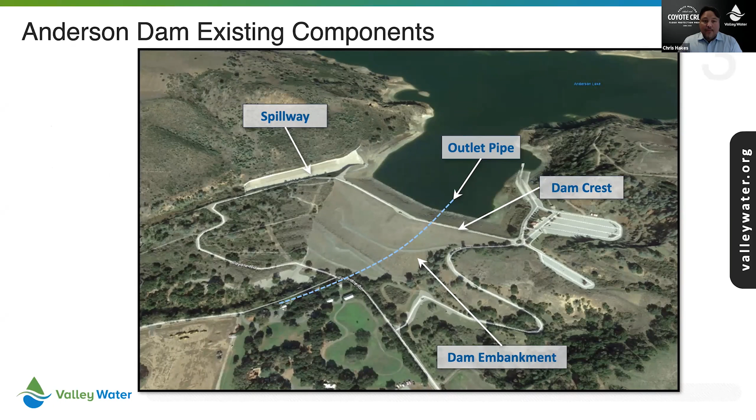That's the existing components. As part of the Anderson Dam Seismic Retrofit Project, we'll be addressing about 5 different areas. First, we'll be taking up all of the material in the embankment except for the core material. When we started the project in 2013, it looked like we just had to add material to the downstream, left side of the dam. Unfortunately, geotechnical explorations in 2016 and 2017 informed us there was a greater potential for the middle of the dam to fall down and depress, or slump, during an earthquake. Since that's the case, we're going to remove all of that unsuitable material and replace it with material that won't slump like that during an earthquake.

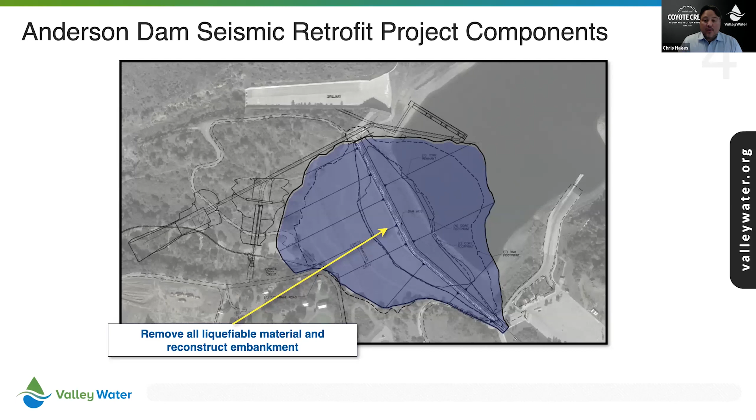We do have a spillway. Originally, we were going to patch it and make minor modifications and repairs. However, after 2017, some of you may remember the torrential rains, and there was the dam up north, Oroville, which had a massive failure of its spillway. As a result, the California Department of Water Resources Division of Safety of Dams, DSOD, mandated that all criteria for spillways be updated, and most spillways across the state need to be fully replaced. So during this project, we'll also be replacing our spillway in its entirety.

We have a new low-level outlet pipe that no longer runs under the center of the dam. This is to accommodate up to 4 feet of movement during a seismic event. We've got a large tunnel with a pipe inside that can move, allowing it to maintain operations during and after an earthquake. And then we have a temporary water diversion system, by which we'll actually drain the reservoir completely empty.

What we'll talk about with the FERC Order Compliance Project is a little bit different—we're draining down to what we call dead pool. The diversion system will actually let us go down to the bottom of the reservoir so we can do the embankment construction. And then we have a high-level outlet pipe.

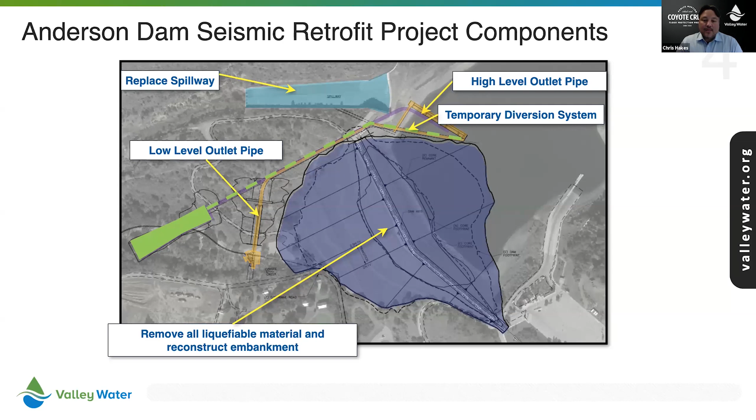This is another mandate from the Division of Safety of Dams, DSOD, that allows us to drain up to 30% of the reservoir capacity within 7 days if directed after a seismic event. So that's a new requirement to meet existing standards as well.

So let's talk about what happened on February 20th. We did receive a letter from the Federal Energy Regulatory Commission that said that the interim risk reduction measures currently in place, our current seismic limit, was insufficient because of the public safety aspects and the risk to the downstream community that existed.

Even though we had a back and forth about what the appropriate level of the reservoir was to balance water supply, environmental need, and public safety, FERC is pretty conservative, and they've said the best way to make sure you don't have an event of uncontrolled release of water during a seismic event is to make sure the reservoir is as low as possible for as long as possible. So that's basically the crux of the directive.

There were 6 elements identified here. We were to immediately lower the restricted elevation, the operating level of the reservoir, from 592 to 565. We were also to develop a plan to drain the reservoir down to dead pool and maintain that level in the case of rains, through the season. On October 1st is when we're actually supposed to start draining down to dead pool. They have given us some time to put that water to beneficial use, which is what we're doing. And then, of course, develop a plan to maintain dead pool in the event of significant rains.

We have to expedite the tunnel construction. So I mentioned the new outlet tunnel that's going through our right abutment. As a way to better control the water surface level in the reservoir, we will be constructing this new tunnel, which varies in diameter depending on where you are, between 19 feet, 23 and a half feet, and 8 feet in diameter. We'll be constructing this tunnel to give us the ability to discharge more water out of Anderson and better control the reservoir level, about up to 5 times what we have now when factored in with the existing outlet.

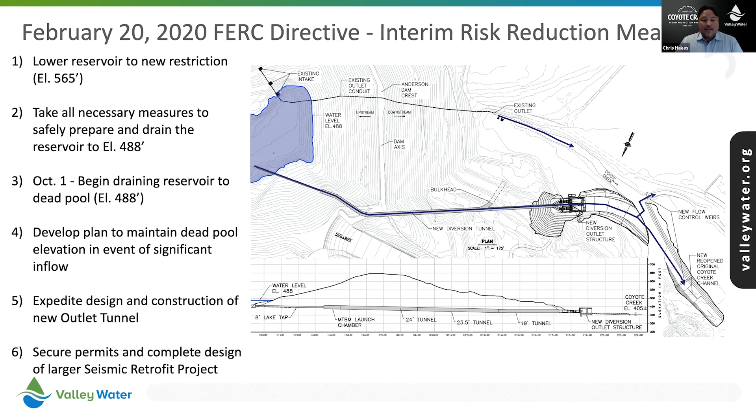So our response, when we received that letter on February 20th: we were in immediate compliance with the new restricted level of 565. We were actually at about 552. That's because we were in our winter operations mode and had already been setting the level of the reservoir so as not to exceed the restriction.

We immediately started planning the Anderson Dam Tunnel project to expedite design and construction of the outlet. So basically we spun off a portion of what used to be the Anderson Dam project. We took that tunnel outlet, modified it a bit, and incorporated it into the FOCP through the Anderson Dam Tunnel Project, or ADTP. I'm sorry for all the acronyms. We also created the Federal Energy Regulatory Commission Order Compliance Project, or the FOCP. That contains not just the tunnel construction, but all of the different measures we're going to use to address the order given to us by FERC.

It basically has 11 unique elements across 4 different areas. For this meeting, I think the key area to talk about is the draining of the reservoir, the construction of the tunnel, and the flood protection mitigation elements that have been identified. Those are the Coyote Creek elements you'll be hearing about later. On May 26th, our board of directors did approve the preliminary project description, which is basically a listing of all the different elements contained in the FOCP.

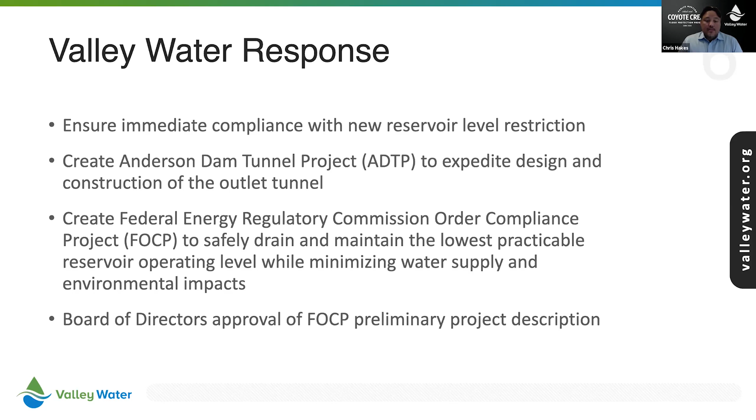So what happens during the FOCP? Of course, we're already in compliance with the elevation 565. October 1st, we'll begin to drain the reservoir down to dead pool, or 488. Dead pool is not completely empty. It's the lowest level that we can drain the reservoir to using our existing inlet-outlet system. So there will be water in the reservoir.

Unfortunately, it's not usable from a recharge, drinking water, or environmental release perspective because we can't get it out of there. And dead pool water does tend to be a little bit stagnant. It will be shallow compared to the overall depth of the dam, which creates a hotter condition where the dissolved oxygen in the water will probably drop, leading to an inhospitable environment for any fish that may be caught there. That is part of the reason why it's called dead pool. So on October 1st, we will begin draining.

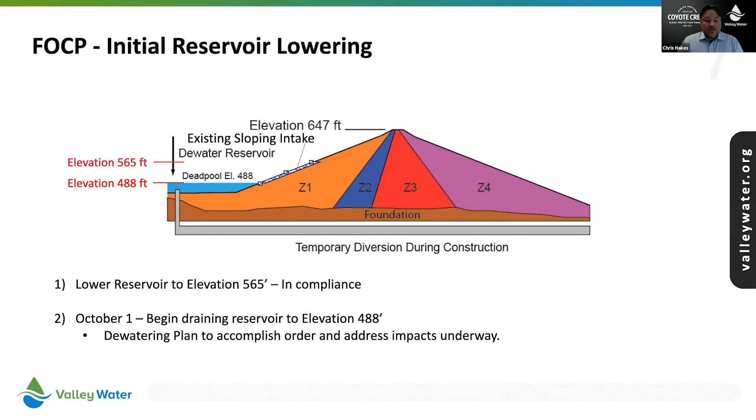We have submitted a plan, not plans and specifications, but a plan to FERC on March 20th in order to get this done for the outlet tunnel construction. We'll begin construction in early 2021. We expect the tunnel construction itself will take between 18 and 24 months, and then we'll have the tie-in to the reservoir, and we expect the project to be complete by the end of 2023 and go into operation.

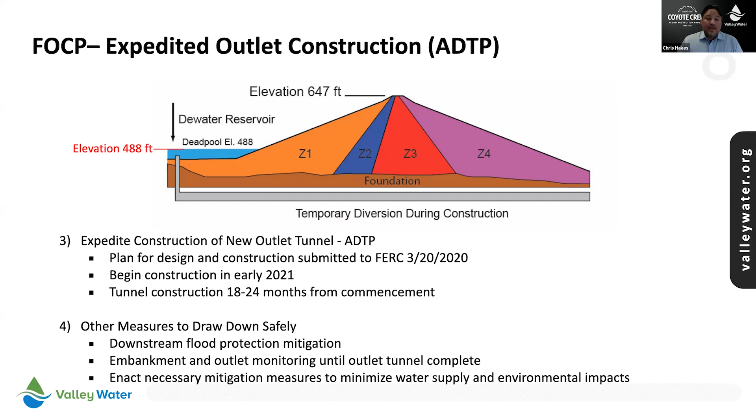Other measures we've identified include downstream flood protection mitigation - those are the Coyote Creek elements. We'll be monitoring the outlet and the rim around the reservoir as we draw down at a very slow, cautious rate to make sure there's no landslides that would affect our ability to use that outlet system. We're also identifying other mitigation measures as necessary to minimize impacts to both the environment and water supply.

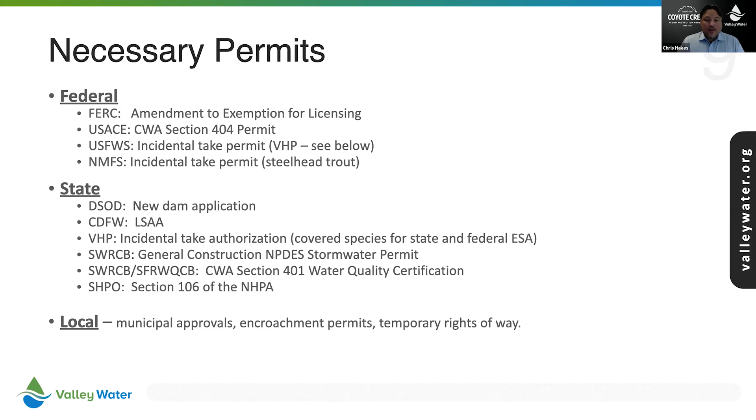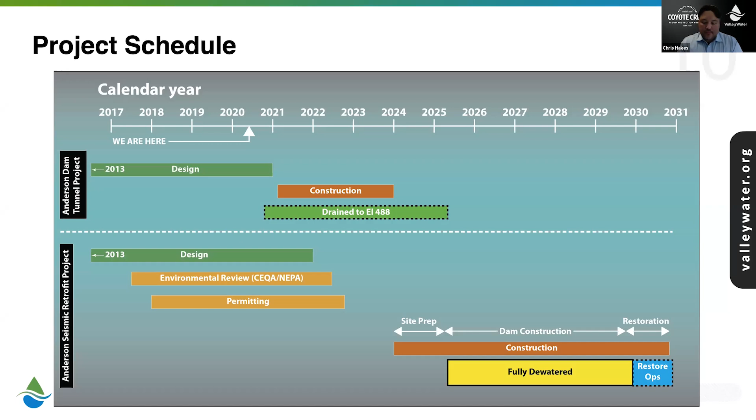And that's the end of my presentation, so I'll turn it back over to Christine.

Tonight, I'm going to talk about the preferred project alternative. Before I delve into the details of the project, let me close this so you can see the entire presentation. I wanted us to get our bearings into where we are in the Coyote Creek Flood Protection Project. This first column shows the major phases of the project. Let me get my pointer. So these are the major phases: planning, design and permitting, and construction. The next column shows the major components of each of the phases.

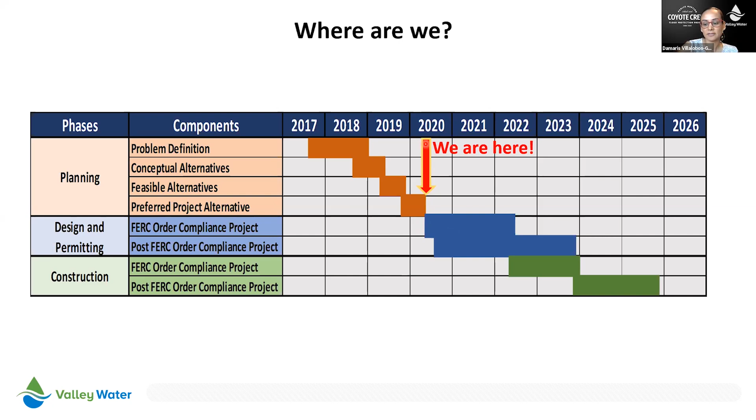If you were able to join past meetings in spring and fall of 2019, you probably heard me talk about problem definition, conceptual alternatives, feasible alternatives, and now we are in the preferred project alternative component. Basically, we are at the end of the planning phase, moving into design and permitting within the summer of this year. Alec is going to talk a little more about this near the end of this presentation, but this is where we are right now, at the end of the planning phase of the project.

Now, what am I going to talk about today? I'm going to give a very brief overview of what we've accomplished together in past meetings. I'll talk about the feasible alternatives we've considered and formed together, and how we move from feasible alternatives into the preferred project alternative via the natural flood protection process. Then I'll talk about the phasing of the project elements, which relates to what Chris Hakes mentioned in his presentation, and go over the project timeline again. I'll introduce the design team, who will talk about next steps—what you can expect to see in the next couple of weeks, months, and years.

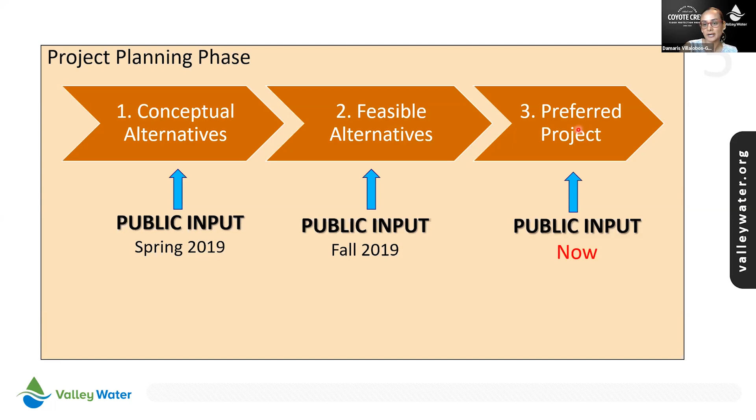Now, what have we accomplished in the past? For those who joined our last meetings, or couldn't, those meetings have been recorded and posted on our website in case you want to review them or watch for the first time. Back in spring of 2019, I presented the conceptual alternatives of the project. We obtained public input and used it to create the feasible alternatives. In fall of 2019, I presented the feasible alternatives and the criteria for them, obtained public input, and now we're moving into the preferred project. At some point we need to have the preferred project to move into design and construction—that's where we are now, and we're getting comments right now.

Before I delve into the details of the preferred project alternative, I wanted to remind everyone that the project scope is very long—9 miles, from Montague Expressway all the way to Tully Road. There are several major parks, roads, and critical facilities within the scope, like Watson Park, William Street Park, Selma Olinder, and Kelley Park, just to name a few. We also have major highways like Highway 880, Highway 101, Highway 280, and other major streets like Oakland Road, Berryessa Road, Santa Clara Street, William Street, and Tully Road, plus several residential, industrial, and commercial areas within the project scope.

Because the project scope is so long, we've divided it into sections or areas we call reaches. So whenever you hear me say reach 4, reach 5, I'm talking about a specific area. Reach 4 goes from Montague Expressway to Old Oakland Road. Reach 5 goes from Old Oakland Road to Mabury Road. Reach 6 goes from Mabury Road to Santa Clara Street. Reach 7 goes from Santa Clara Street to Highway 280. And Reach 8 goes from Highway 280 to Tully Road.

Now, why am I mentioning this? Because as I go over the list of feasible alternatives, I'm talking about alternatives for the entire project scope—we're looking for the preferred project that meets requirements for the entire scope, not just a specific section. For this meeting, I'm focusing on project elements within Reach 6 and Reach 7, basically from Mabury Road to Highway 280. On June 10th, last week, I focused on Reaches 4 and 5, and on June 11th, I focused on Reach 8. You're welcome to go to our website and review those recordings.

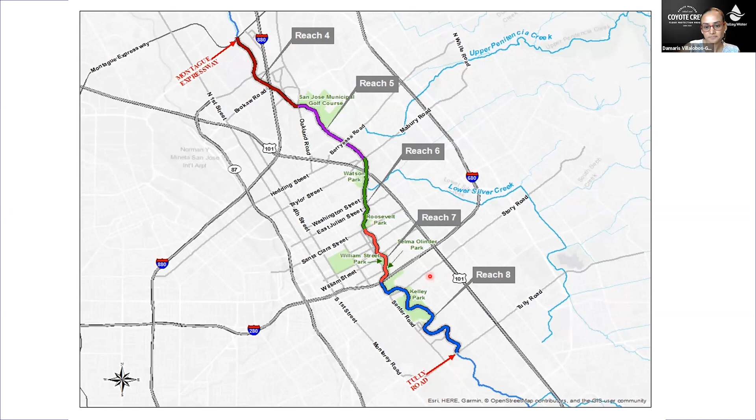Now, how do we develop a project alternative? In the past, as we had meetings in spring and fall of last year, what we did is we developed together what I like to call flood risk reduction options for each of the reaches or areas. For example, for Reach 4, we developed 2 options. For Reach 5, we developed 1. For Reach 6, we developed 1. For Reach 7, we developed 5 flood risk reduction options. And for Reach 8, we developed 1.

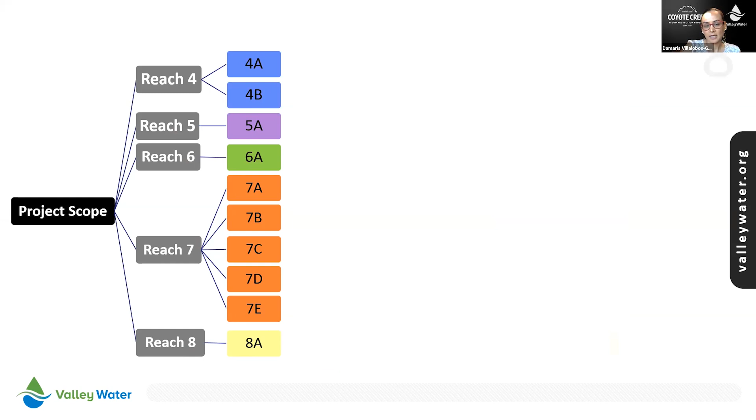So what does it mean to have a project alternative? A project alternative is basically a combination of these various options. Alternative 1, for example, we have 4A, 5A, 6A, 7A, and 8A. Alternative 2, we have a different combination, now selecting 7B. Project alternative 3, now we're selecting 7C, 7D, 7E. And then you notice we haven't used 4B, so now we have to select 4B and make different combinations with the different flood risk reduction options for each reach.

Now we have a total for this specific project, for the Coyote Creek Flood Protection Project, a total of 10 project alternatives, and I'll go over what those are specifically for reaches 6 and 7. We always add the no project alternative to all of our projects, because sometimes having a no project, doing nothing, is better than actually adding some structural elements to the various areas. So how does 6A look like? How does 7A, 7B, C, D, E look like for this community?

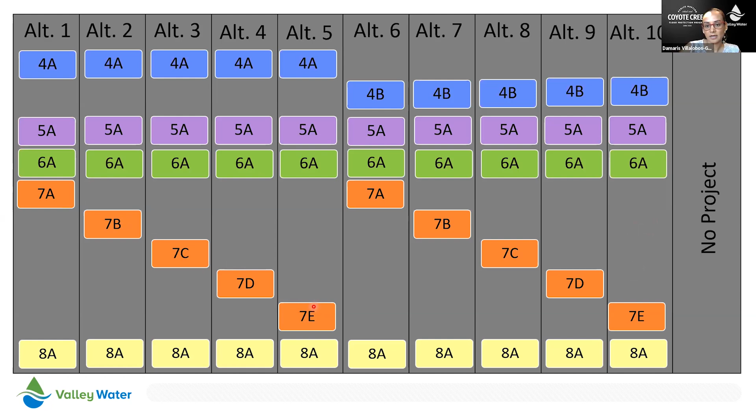Okay, so now going into 6A, before I go into the details, I want to go over the legend. Pink means a berm, and I'll show you pictures of what this is. Yellow is a passive barrier, and orange is a flood wall.

For Reach 6, and we only have one option, 6A, what we're proposing is to have flood walls from Mabury Road all the way to Highway 101, reducing the risk of flooding to this critical facility, the City of San Jose Mabury Yard, as well as the industrial/commercial area on the west side of the creek. We're also proposing a flood wall that's gonna reduce the risk of flooding to Highway 101.

Now moving on to Watson Park. You might remember this from past meetings, but what we're proposing is an approximately 1,200 feet long, 6 feet tall flood wall that is gonna replace the existing retaining wall that is in that location. And that's gonna continue and become a passive barrier and then a berm.

So these 3 elements work in conjunction to basically contain any flood waters within the park, so that they don't get out of the park, go into Jackson Street and flood areas of Monferrino Drive like they did in 2017. So all of these project elements work in conjunction.

Now, we're also proposing flood walls to reduce the risk of flooding at the Empire Gardens Elementary School. Moving to the east, we're proposing a short flood wall to protect Kellogg Company. And we're also proposing a flood wall approximately 5.5 feet tall to reduce the risk of flooding to the Parkside Terrace apartments.

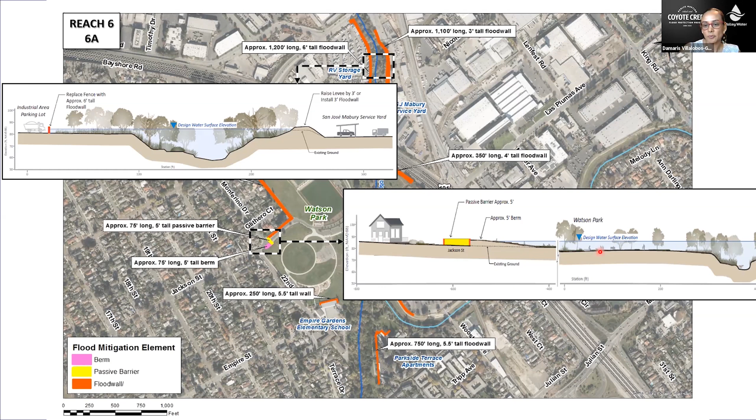As you might remember, Watson Park got flooded during 2017. Watson Park is part of the historical floodplain of Coyote Creek. So what we're doing is allowing the creek to do what it wants to do in this area without flooding the residential areas. And here's another picture of how this area might look like, with the Parkside Terrace apartment buildings and an approximately 5.5 foot flood wall.

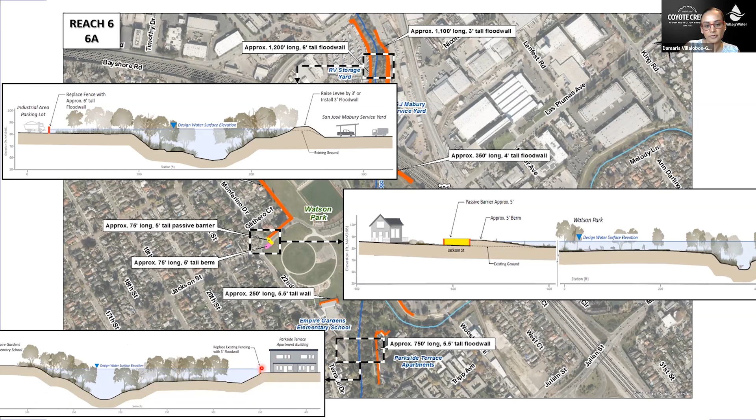Now, how would a flood wall look like? We don't know yet. That's gonna be determined during the design phase of the project with your help and the help of stakeholders. So we understand, and the board understands, that it is important for any element we're proposing to reflect the character of the community, and during the design phase, aesthetics is gonna be an important element. We know what we need to have in here, we know the element, a flood wall, but in terms of how it looks, it can look in various ways.

If you ask me, if I have a flood wall in my neighborhood, I would like to have murals and art and things like that, but other neighborhoods might want some other things. So these are just examples of how flood walls might look.

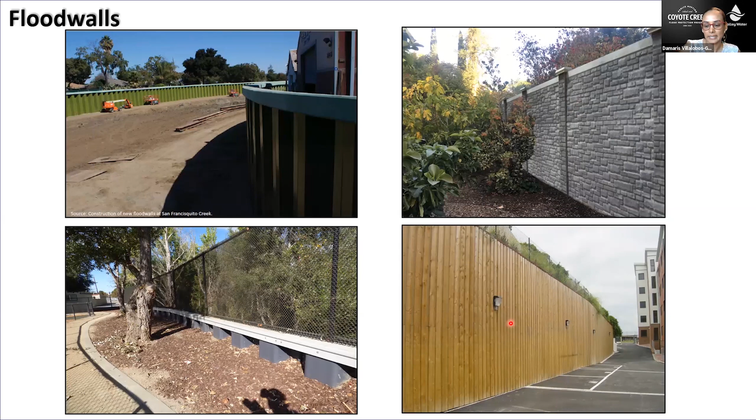Now, how would a berm look? We don't know yet. What we do know is a berm is a kind of raised strip of land that provides a vertical barrier to contain water within a specific area. This first example is an existing berm that was constructed right after the February 2017 event. It's approximately 3.5 feet tall. I included this picture with this person standing at the bottom of the berm, and some people standing at the top of the berm. Again, this is a 3.5 foot berm.

Back in 2017, after the flood event, they also built a road on top of the berm to allow access into the other side. So that's something that is possible to add, a road to access it, inspect it, and do any maintenance needed on the berm.

Now this is another example. When we went to the San Jose Parks advocates to talk about the project, some of them said they'd like to see local pollinator plants that can attract critters, bees, and hummingbirds. So that's another example of how it might look, depending on the neighborhood. There are other different examples of a berm. All we need is a vertical clearance, and of course we need enough room, wide enough to build that berm.

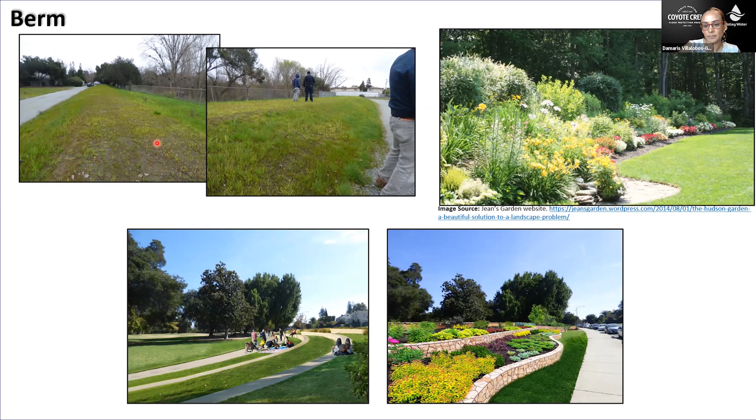Now, I'm not going to go into the details of a passive barrier, but I've included these in the presentation because this presentation is also on our website. You're welcome to look at the videos of how the passive barrier works. I'm not going to spend a lot of time on it today in the interest of time.

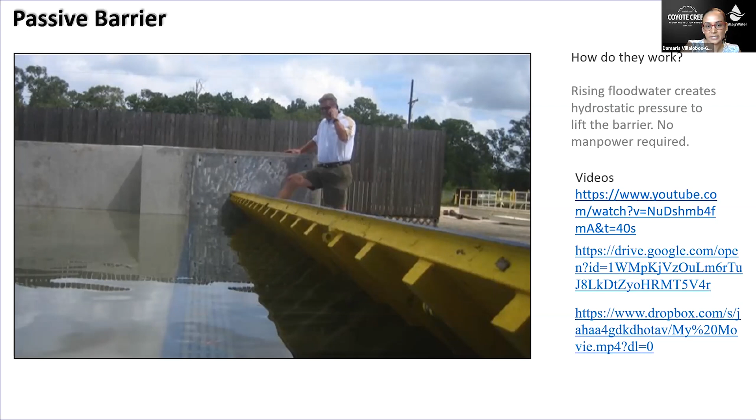All of the elements I mentioned before, flood walls, berms, all of those apply to Reach 7 as well. So I'm not going to present pictures for all of the options for Reach 7, because as you saw, there are 5 flood risk reduction options for Reach 7. I'm going to try to be brief and succinct, but there are a lot of elements and I want everybody to understand how they work together and what elements we're proposing.

So I'm going to start with 7A. Again, we have 7A through 7E. I'll start with the legend: pink means berm, purple means elevate, orange means flood wall, and yellow means passive barrier. To avoid spending too much time on these maps, since I don't want to take all the time away from hearing from you, I changed these callouts. The pink ones are the elements that change from option to option, and the white ones stay the same.

So I'm only going to go over everything for option 7A, and for options 7B through E, I'm only going to go over the pink elements, which are the ones that change.

Now, for the purple areas, we are proposing to elevate those structures. We're proposing to elevate structures located on South 17th Street between Santa Clara Street and San Fernando Street—3 properties. Elevate all 4 properties located east of Arroyo Way, 3 properties located west of Brookwood Avenue, 2 properties at the corner of San Salvador Street and South 17th Street, and 1 property on William Street, right next to the William Street Bridge. Elevate basically means raising the structure above the base flood elevation.

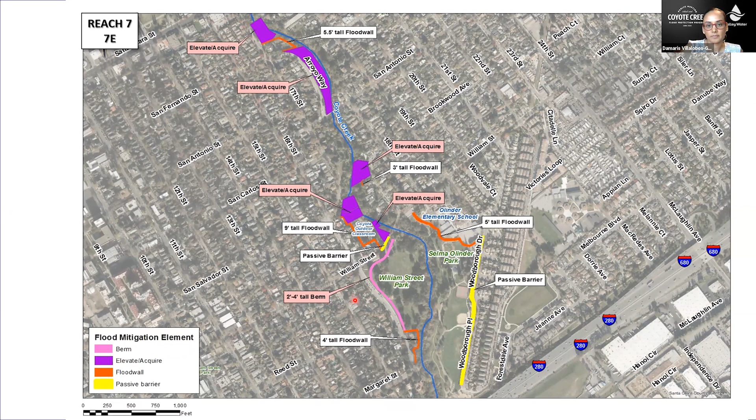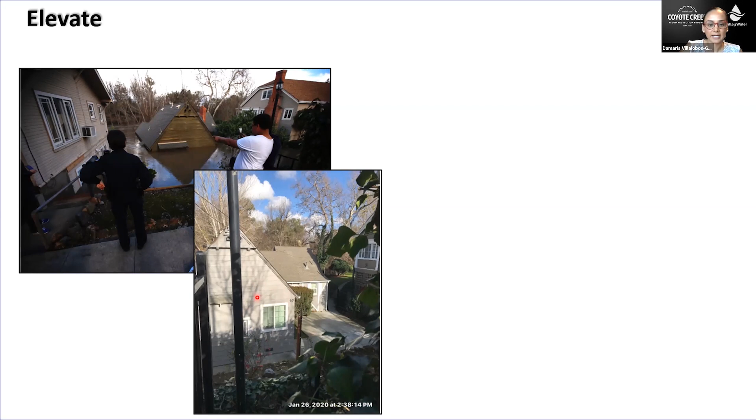This is the home during 2017. This is the date, January 26, 2020. This picture is recent, well, 5 months ago, but it seems like 10 years ago. You can see that the home has been painted and some elements have been beautified, but it's still located within the banks of the creek.

So what does elevate mean? Back in January, we contracted a consultant to do a planning level feasibility assessment to see if we could even bring elevate to the table, because what if the home cannot be elevated? We asked them to see all 10 properties we were proposing to elevate, but we were only able to see 4 properties, unfortunately. The information they gave us was very helpful.

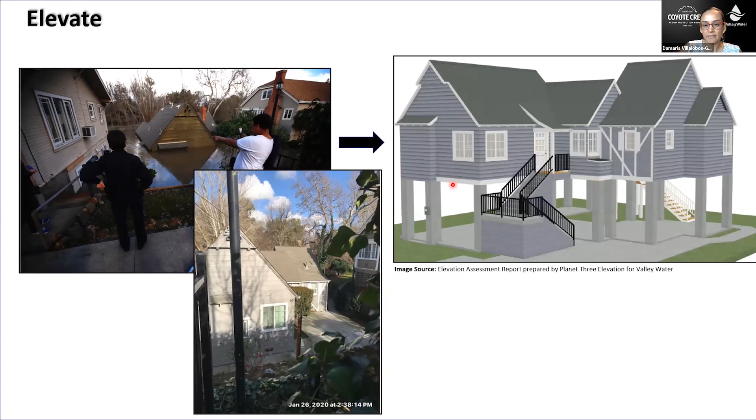So this is a rendering of this same house. This is actually the front of the house, this area here. You can see the window, you can see this area here. This is the front, and basically it is elevated on columns, elevated up to the street level.

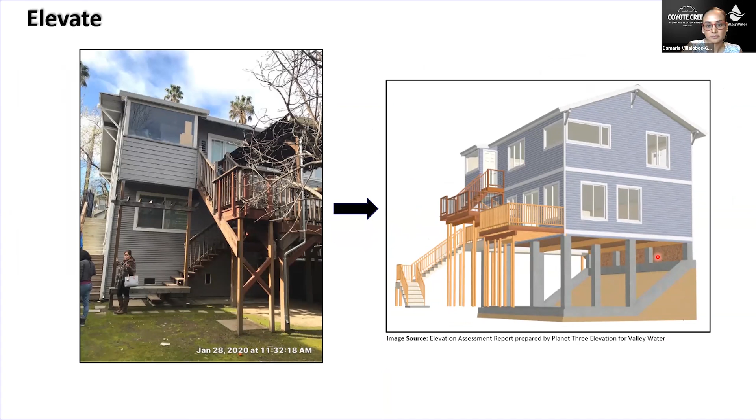Now, how do we go from having all these 10 or 11 feasible alternatives into actually selecting a preferred project? We do this using the Natural Flood Protection Framework. This framework is a Valley Water Board policy that looks to balance environmental quality, community benefit, and protection from flooding in a cost-effective manner, considering the physical, hydrologic, and ecological functions and processes of a stream. So basically, this gives us the least environmentally damaging practicable alternative.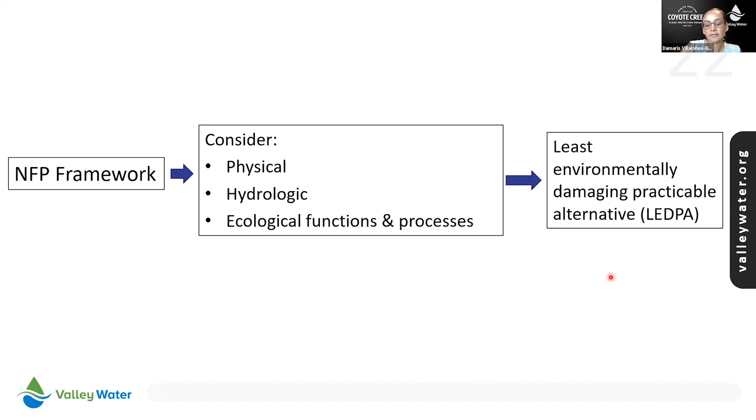This framework was not developed by the project team. It was developed a while back in the early 2000s, a Valley Water Board policy developed by a group of external and internal experts. It grades a project from the point of view of 36 different environmental criteria. What does that mean for us? I've listed all of the project alternatives in this slide, from alternative 1 all the way to 10.

And I also listed the estimated planning level costs. The project cost in the planning level has been approximated between $72 million and $92 million. I also added the expected annual operations and maintenance costs in this last column, between $1.2 and $1.3 million annually. And then for no project, basically you don't have any cost of the project, but you also have an approximated average cost up to now of doing maintenance in the creek.

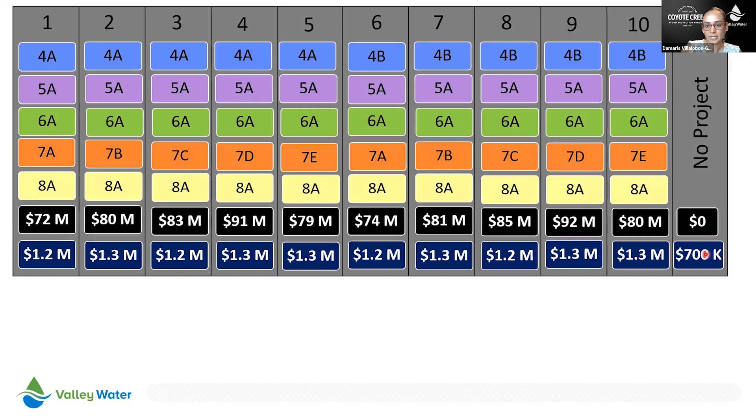You apply the NFP framework to select the preferred project alternative. This NFP, or Natural Flood Protection Framework, is a qualitative method, and it's selected two high rated project alternatives, alternative 7 and alternative 10. I'll show you how they look for the two areas that we're focusing on.

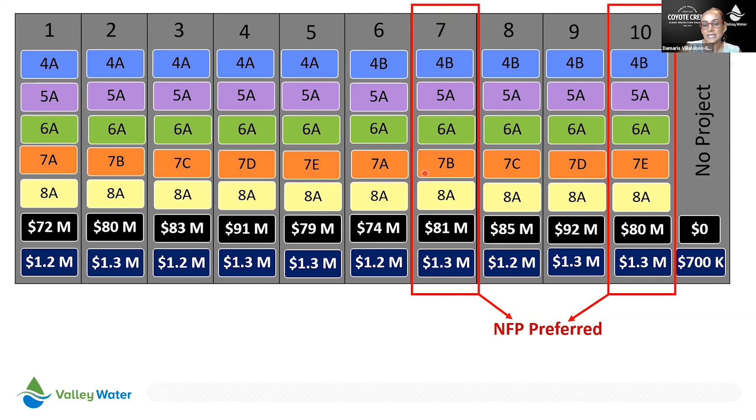6A, of course, doesn't change. For reach 7, we have 7B and 7E. Just showing you a picture of 6A, we only have one option. 7B, the purple areas here, acquire. It's all acquire, and then we have the berm on the western edge of William Street Park. 7E is the hybrid option, elevate or acquire in the purple areas. We've also had the NFP process select the 2 to 4 feet tall berm. So those are the preferred options.

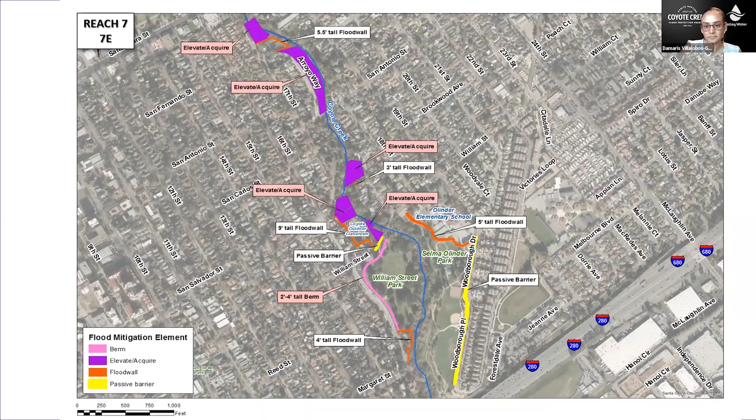Now that concludes the preferred option presentation, the preferred project alternative presentation. But I wanted to go over the FERC order compliance flood management measures, since some residents and stakeholders have been confused about what this means for us for this project.

So again, on February 20th, the Federal Energy Regulatory Commission sent a letter to Valley Water directing Valley Water to start lowering Anderson Dam to dead pool no later than October 1st, 2020. FERC also directed Valley Water to expedite implementation of the diversion tunnel system, the Anderson Dam Tunnel project. This tunnel system is scheduled to complete construction by December 2023, and it is designed for a maximum discharge of 2,000 cubic feet per second, plus additional contribution from existing outlet and tributary flows.

What does this mean for us, for this project? Valley Water has identified those areas within Coyote Creek where flooding would occur as a result of implementing the FERC order. Those elements happen to be part of some of the elements in our Coyote Creek Flood Protection Project, and they are necessary as avoidance and minimization measures for the ADTP to prevent flooding within urbanized areas. This project is called the FERC Order Compliance Project.

Which areas are those? The FERC Order Compliance Project identifies some flow thresholds that the ADTP emergency operation is going to see from upstream, and I've listed them in this table. We look at the approximate creek capacity within the area of the project, and we identify those areas that have capacities lower than the threshold or than the ADTP emergency operation values. Those areas are located within reaches 5, 6, and 7.

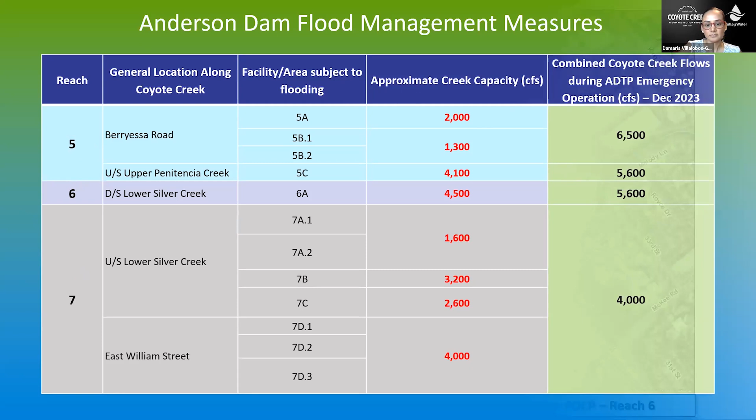What does this mean? For reach 6, you've seen this map before. You can see that there are some elements that are more transparent and some that are not. This means that for the FOCP project, all of those non-transparent elements need to be built by December 2023. So those are what I like to call super expedited elements, and we've identified those elements.

This is one of the elements within reach 6. In reach 6, there is actually only one element. Why is this? Because the approximate capacity right now of this area is 4,500 cubic feet per second, and the ADTP emergency operation flow is anticipated to see flows in this area on the order of 5,600 cubic feet per second. So if this is released, or we see these flows from upstream, this area is going to flood after December 2023.

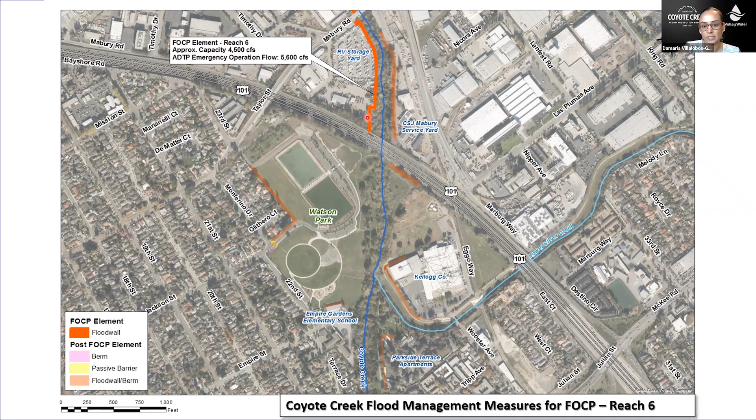Similarly, for reach 7, I have included all of the elements of the preferred project alternative, but there are some elements that are transparent. The ones that are not transparent are the ones that need to be built as part of the FERC order compliance project, because they have approximate capacities that are lower than what is going to be expected after the Anderson Dam Tunnel project starts operating.

For example, for this area located east of South 17th Street, between Santa Clara and San Fernando Street, the approximate capacity before the properties begin flooding is 1,600 cubic feet per second, and the ADTP emergency operation flow is expected to be 4,000 cubic feet per second. So all of these elements are part of the FOCP. That doesn't mean that the rest of the project is not going to be built.

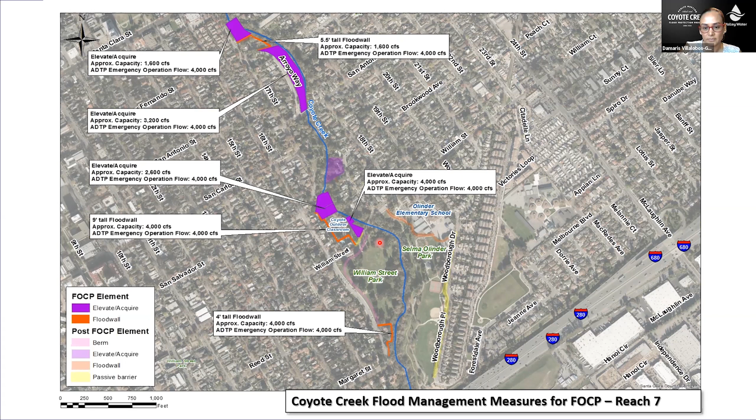It means that those elements that are not transparent need to be built by December 2023, and the schedule for the rest of the elements will be given by the design team in a minute. Again, we are here at the end of the planning phase of the project. With that, I'd like to turn it over to Alec Nicholas, who's the capital engineering manager for one of our design and construction units.

The remaining elements of the Coyote Creek Flood Protection Project in reaches 4, 5, 6, 7, and 8 that weren't already designed and constructed will follow suit on almost parallel schedules, first in design and then into construction. These elements will need to be in place by fall 2025 to coincide with the site preparation for construction of the Anderson Dam seismic retrofit project, specifically the completion of the high-level outlet that Chris Hakes was mentioning. All these elements in design will benefit not only adjacent properties or businesses, but also the surrounding neighborhoods.

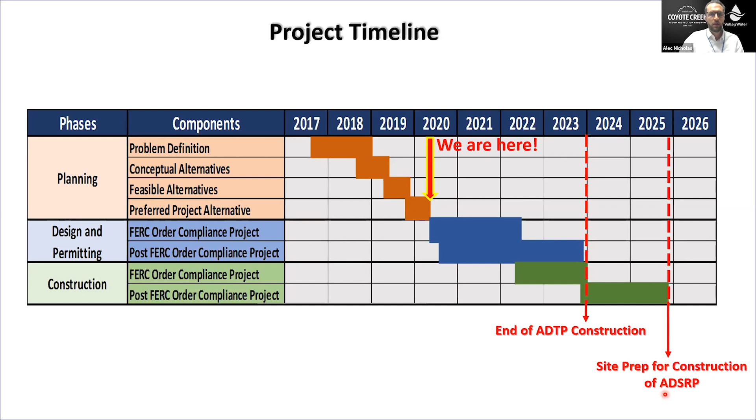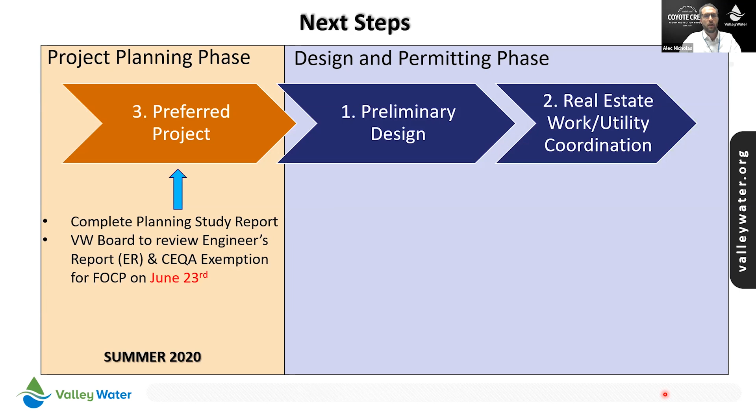As we go into the design phase, we'll be coordinating various aspects. To summarize, we are wrapping up the planning phase right now. We'll be completing the planning study report shortly. The Valley Water Board will be reviewing the engineer's report and the CEQA exemption for the FOCP at the June 23rd Valley Water Board meeting. Once the board approves the engineer's report, the project will transition to the design phase.

In the design phase there are several key elements, and the first two coming up shortly are the preliminary design aspect, as well as real estate work and utility coordination. Preliminary design includes collecting project data, reviewing existing right-of-way information, procuring external design consultants, and selecting design alternatives. At the same time, for real estate and utility coordination, we will begin negotiations with property owners after the engineer's report is approved by the Valley Water Board, acquiring any necessary easements and coordinating with utilities and municipalities.

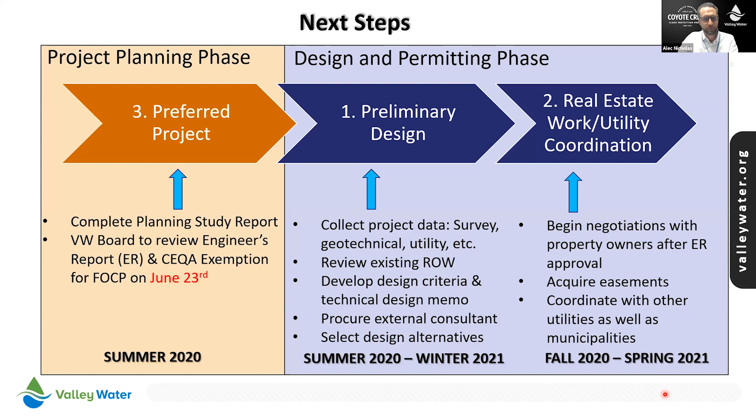The remaining design elements include environmental permitting, final design, and advertising for construction. During the entire design phase, just as in the planning phase, we will continue meeting with the public and updating them on the project's status, soliciting input on various design elements including aesthetics, signage, open space, and public art. We want to hear from you, what you prefer, and your thoughts for each specific neighborhood. We want to make sure each element is compatible with the surrounding community, and it is a Valley Water Board policy, especially for aesthetics, so we take that very seriously and really want to hear from you during the design phase.

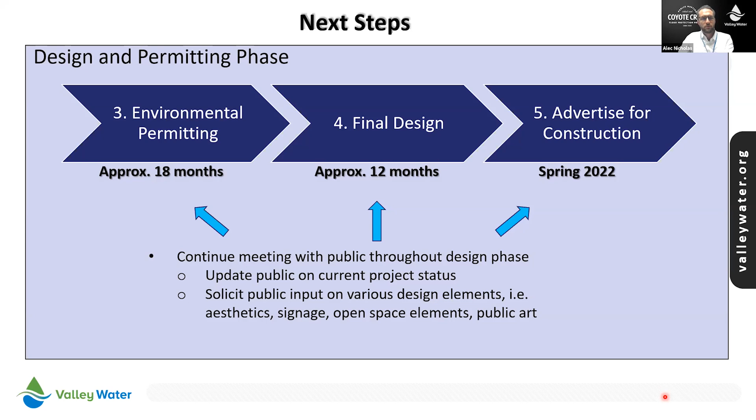Now I would like to transition to introducing the design team. Again, my name is Alec Nicholas, I'm the Capital Engineering Manager. During the design phase, the main point of contact will be the project manager, Lotina Nishijima, as well as Jose Villarreal, the public information representative. Additionally, we are very fortunate that Damaris will be joining the design team as an assistant project manager. Now I'd like to take a few minutes to let Lotina and Jose introduce themselves.

Hi everyone, as Alec mentioned, my name is Lotina Nishijima. I look forward to working on this exciting project with everyone. Looking forward to talking with you. And I'll reintroduce Jose Villarreal. Hello again, welcome everyone, just looking forward to working with everybody as we move this project forward. Thank you very much. And with that, I will transition back to Christine.

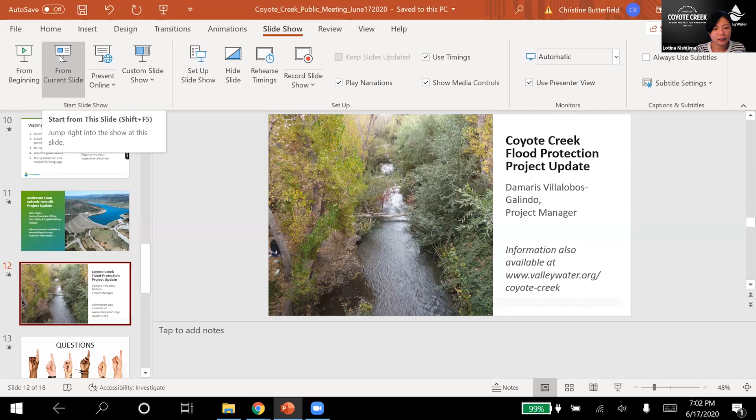Both presentations were very interesting. Thank you very much, Alec and Damaris. Now it's time to hear from you.